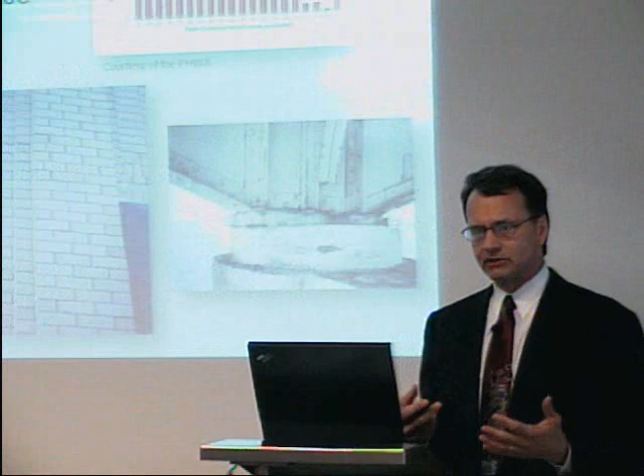By way of introduction, the aging infrastructure in developed countries requires cost-effective and timely inspection and maintenance. You've maybe seen this graph here on the right. In red is the total number of structures constructed as a function of year, these are bridge structures, and the black line is the percent that are structurally deficient. You can see that in the 40s, 50s, and 60s many new structures were constructed, but as time goes on these structures need to be repaired, so we have to be worried about this class of structures. The ability to detect damage at an early stage can reduce the cost and downtime associated with repair of critical damage.

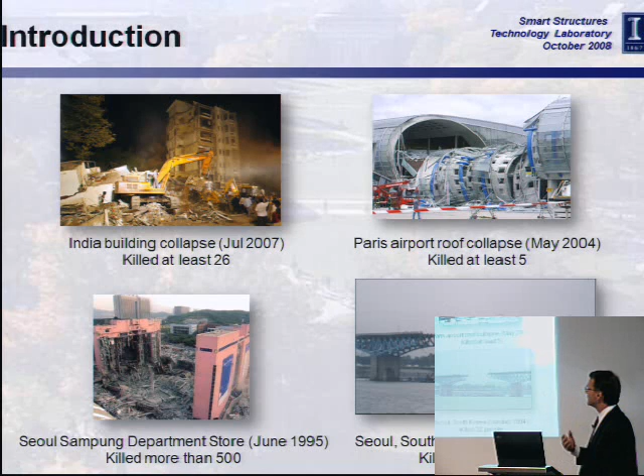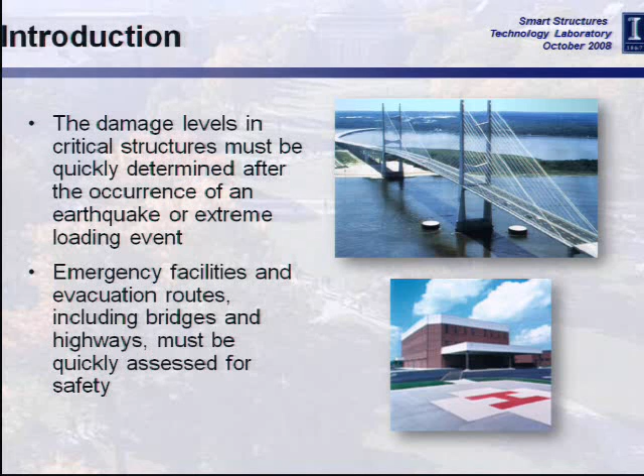Here are some examples: in India in 2007, in Paris in 2004, and a couple of examples in Seoul, where these structures were not known to be problematic, and all of a sudden there was a sudden collapse. In addition, we have to worry about natural disasters—earthquakes, winds, and other extreme loading events.

We have to monitor these structures to ensure that emergency facilities and evacuation routes, including bridges and highways, are quickly assessed for safety, and that appropriate steps are taken to move emergency vehicles along these routes. These are just some examples from Katrina and other recent earthquakes to remind us of the problems that can be caused by such extreme loading events.

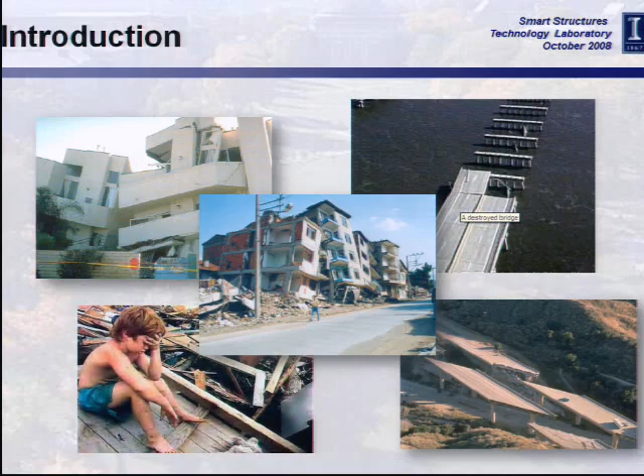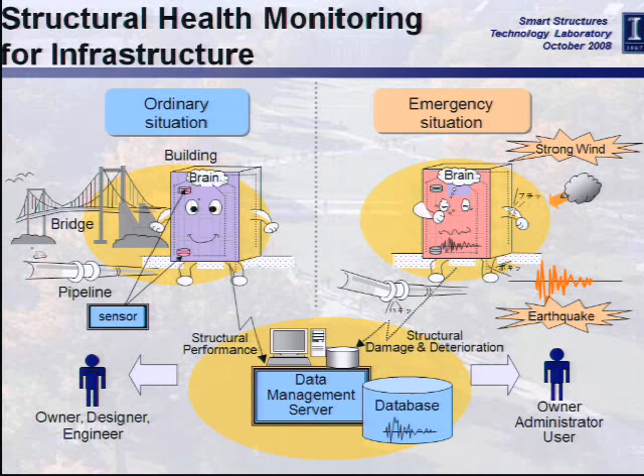I got this from a friend in Shimizu Corporation, and the Japanese are very good at making these cartoon drawings that illustrate the main problems. For a structural health monitoring system, we generally have two situations.

That is the ordinary situation, or maintenance and operation, and then the emergency situation. In the ordinary situation, sensors on the structure collect information about structural performance that can then go to a data management server, which can inform the owner, the designer, and the engineer.

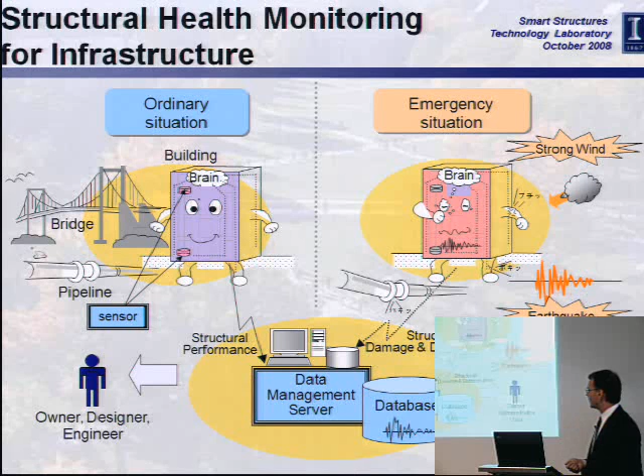In contrast, during the emergency situation, we have the critical need for more real-time information, so information about damage and deterioration during these extreme events can be fed into this data management system to inform the owner, administrators, or users, and to help in emergency reconnaissance.

As an outline of the talk I'm going to give today, I'd like to tell you about the current status of structural health monitoring technology for civil engineering applications, review a few of these, and then point to some of the most promising future technologies for structural health monitoring.

So why do we want to monitor infrastructure? I gave you some high-level views of this, but in particular...

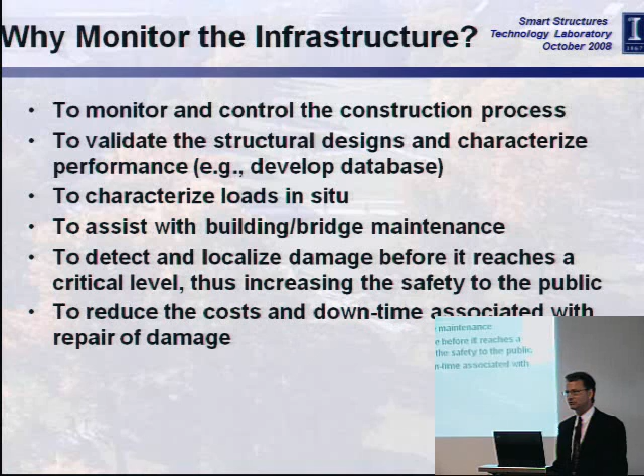People monitor structures to control the construction process as the structure is being built, to validate structural designs and characterize performance, develop databases, characterize in situ loads, and assist with building and bridge maintenance. Also to detect and localize damage before it reaches a critical level, increasing safety to the public, to reduce the cost and downtime associated with repair, and to assist with emergency response efforts, including building evacuation and traffic control.

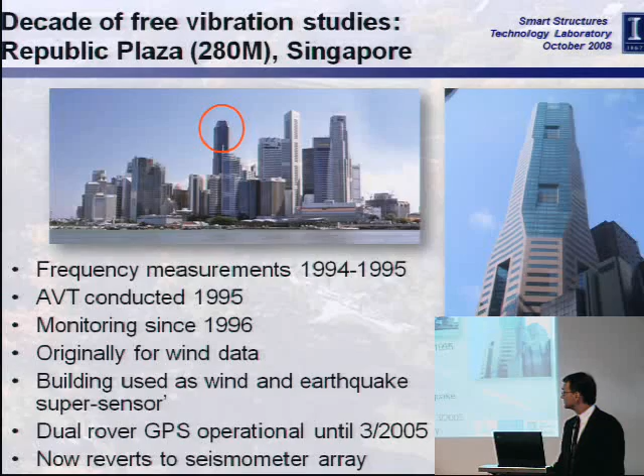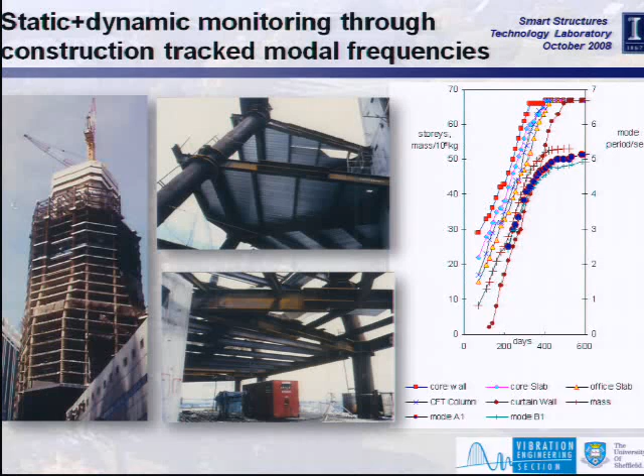You can see that whenever the construction was initiated, the period was quite short, very high frequency, and as the structure got taller and taller, the period got longer until it stabilized for the various components of the structure. This is what one would expect to see, and it can be compared to models of the structure to ensure the construction process is going as expected.

These are some of the sensors: force balance accelerometers in the roof and in the basement, anemometers, GPS antennas, and loggers. And here's what I meant about a super sensor.

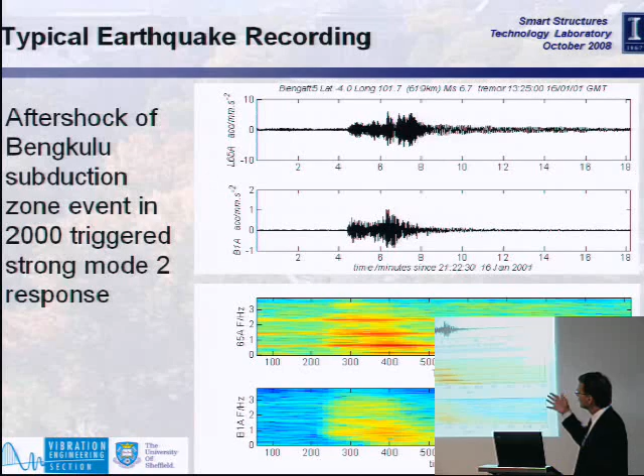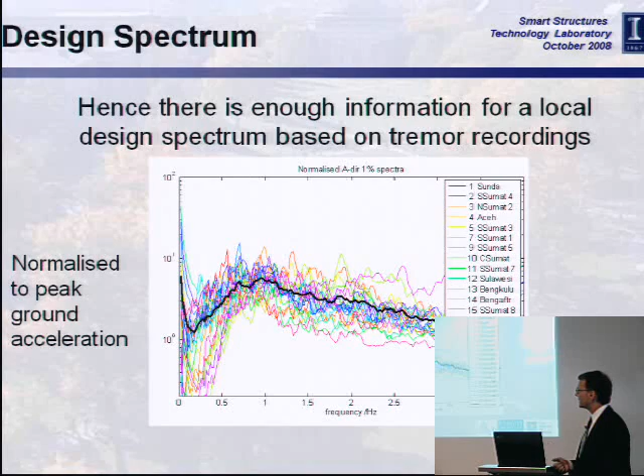These are some aftershocks from a year 2000 event. What we can do is, from these measured responses, develop enough information for a local design spectrum, so you can characterize the local loading situation much more effectively than with the typical approach.

Here's another example, from my colleague Ahsan Kareem at the University of Notre Dame, in partnership with Skidmore, Owings & Merrill in Chicago. One of the things they're concerned about is what type of damping real structures have.

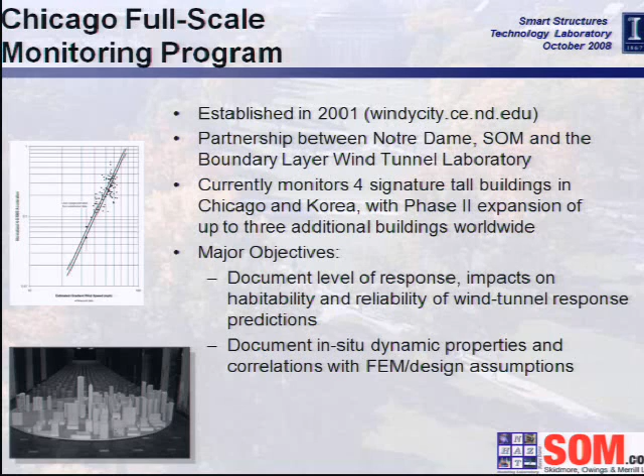If you're concerned about wind and you assume there's 5% damping in a real structure, you're in much better shape than if you assume there's only 1% damping. So if they can get a better handle on what the real damping is in the structure, then they can refine their designs.

This is Bill Iwan gave me this slide. This is a project to monitor the Millikan Library, and I thought this was relatively interesting. You've got a fairly short building, 10 stories. And what we have here is the data for the first mode.

If we just assumed that we had a shear building, which one might use for a 10-story building, that would be this blue line. And you can see it doesn't characterize the real measured dynamic behavior of the structure.

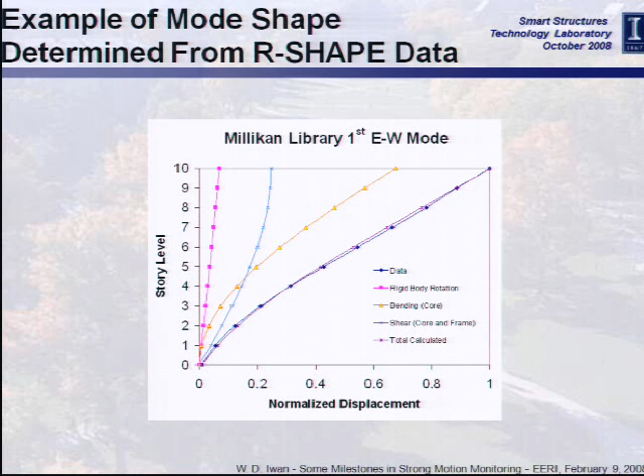If you assume that the structure was behaving primarily in bending, that would be this yellow triangled line, and you can see that doesn't capture the full behavior either. Then there's rigid body rotation, just rocking on the foundation of that structure. It's these combined motions that were actually present in the dynamic response of the Millikan Library.

So the assumptions that we would have in the design and construction of this building can be validated and better understood with this data that's measured here.

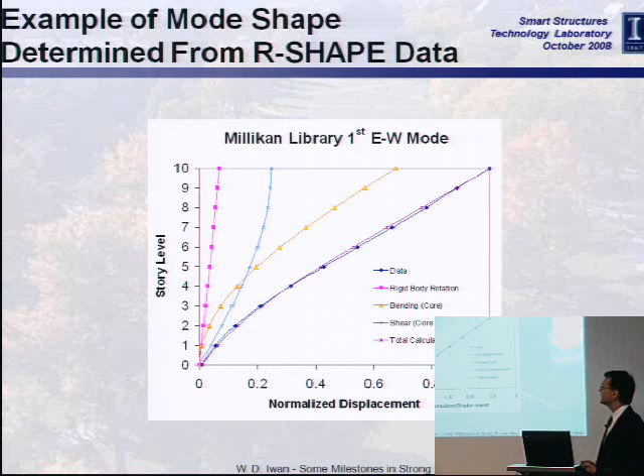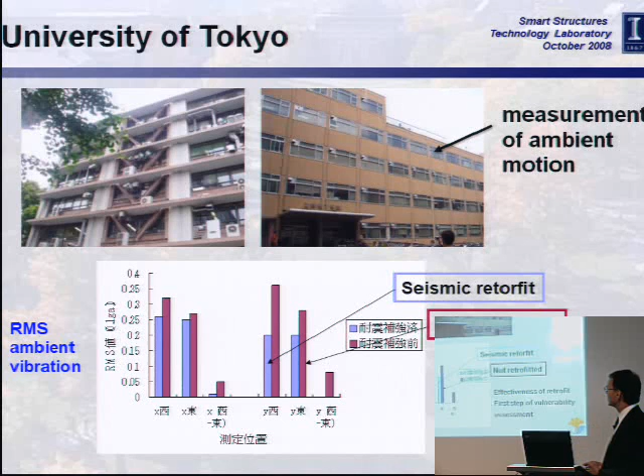This is an example from Professor Fujino at the University of Tokyo, where building number 11, I believe it was, was seismically retrofitted. They monitored the ambient vibration before and after the seismic retrofit, and were able to show a reduction in the RMS ambient vibration, which they concluded was an indication of the effectiveness of the seismic retrofit.

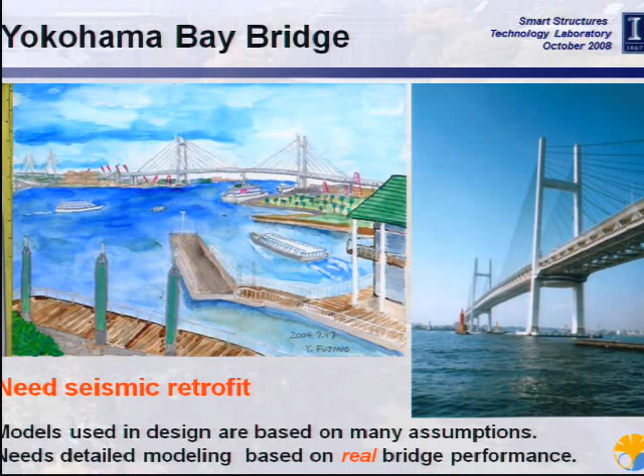Professor Fujino is also a painter in addition to being a bridge engineer, and the Yokohama Bay Bridge is shown here from his 2004 New Year's card. This structure had a number of models used in the design, based on many assumptions. But it needs to be seismically retrofitted now, and there's the question of how those initial models and designs compare to the as-built structure.

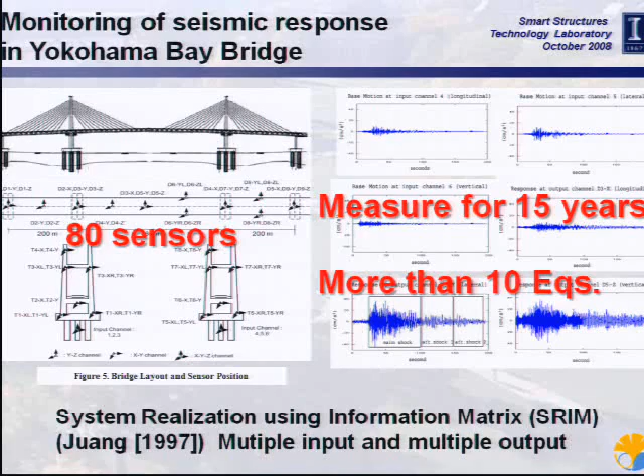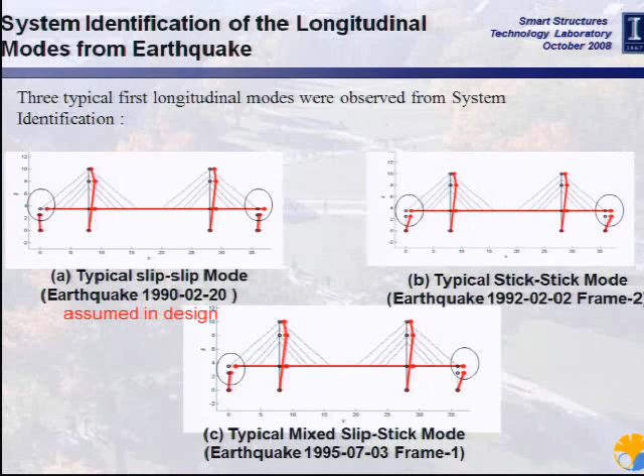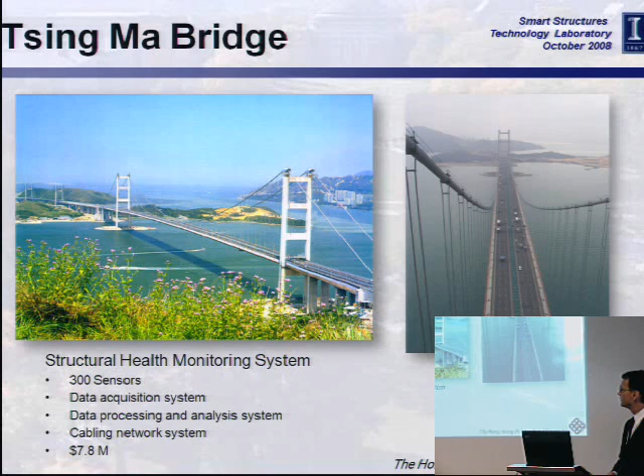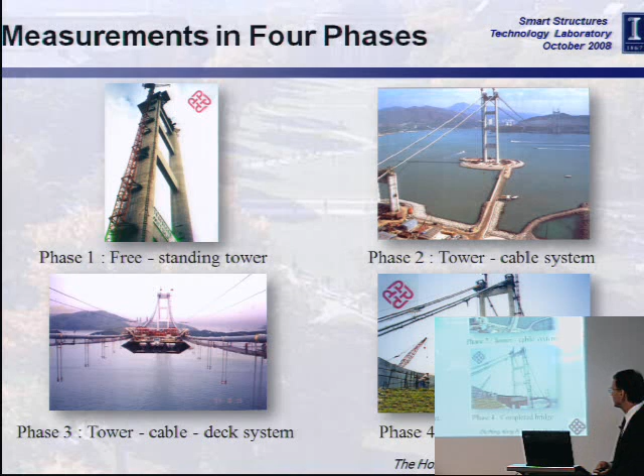So these were just some examples to illustrate where we are with structural health monitoring for civil infrastructure. Currently, we can do real-time data collection and presentation, data storage, data statistics and comparison with baselines, and then warnings of anomalies in the data. But that doesn't really fulfill the promise of structural health monitoring that we talked about previously.

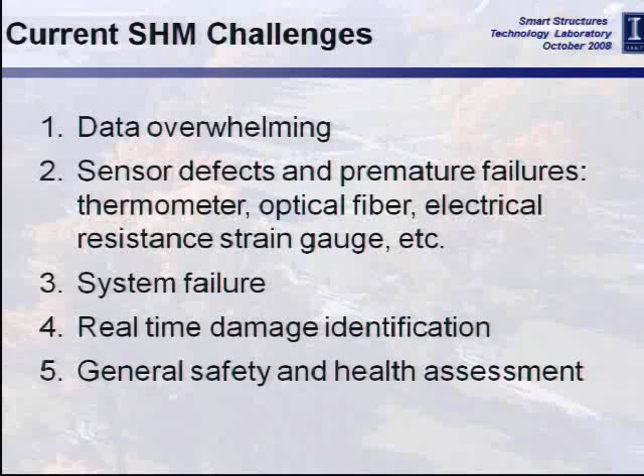Some of the current challenges are that the data is overwhelming—there's reams and reams of data collected for some of these bridges, and nobody ever sees it. Sensors have defects and premature failures: thermometers, optical fibers, electrical resistance strain gauges, etc. So reliability is an issue. Failure of the entire system, the data acquisition system, may go down. And then there's the idea of real-time damage identification and general safety and health assessment. So we're not there yet with regard to achieving this type of performance or information from structural health monitoring systems.

So what I would like to do now is tell you about some of the future directions that may address some of these challenges.

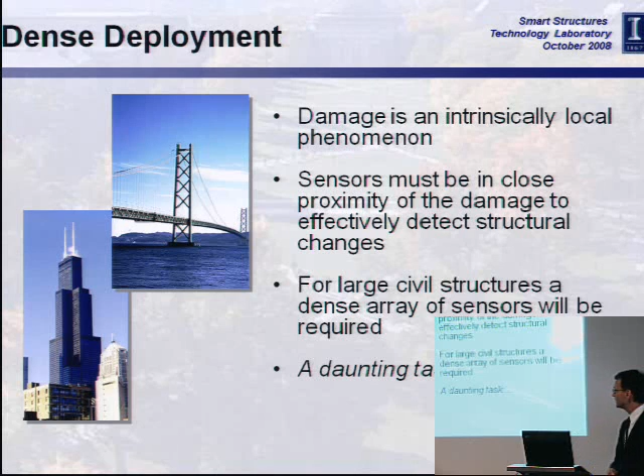One of the things that's been informing a lot of research these days is bioinspiration. As a matter of fact, there's a new program at the National Science Foundation that Dr. Shih-Chi Liu is leading on biosensing and bioactuation. It's in the Emerging Frontiers in Research and Innovation program this year.

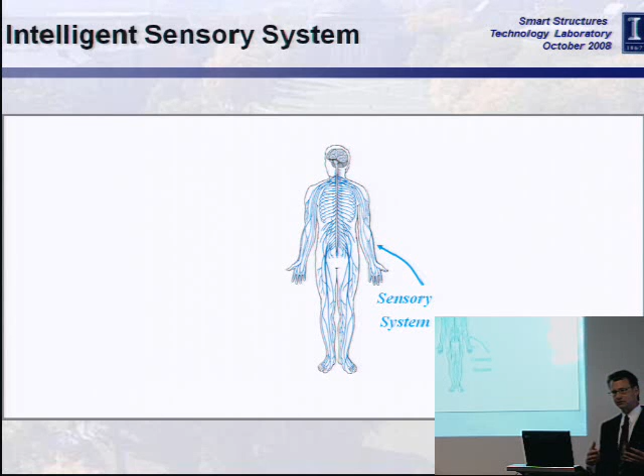If we look at the sensory system of the human body, you can see that there are sensors distributed throughout the body, and they're not uniformly distributed. In some locations you have more sensors where they're needed. So one might imagine that in a structure, to be able to detect damage and fully understand the state of the structure at arbitrary locations, one would need to have such a dense array of sensors.

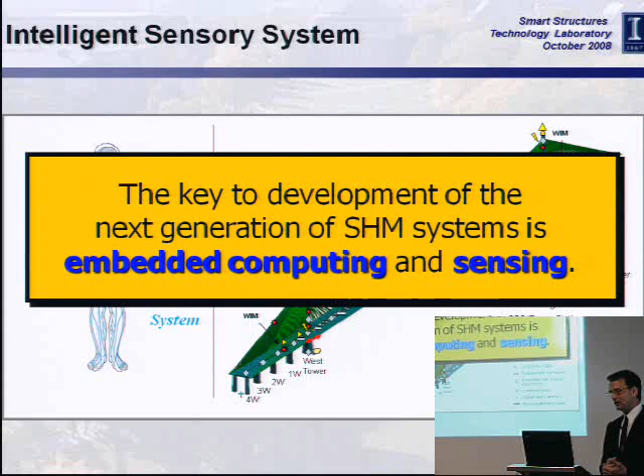So the key to the development of the next generation of structural health monitoring systems, to be able to have the scalability and the cost savings, is going to be embedded computing and sensing.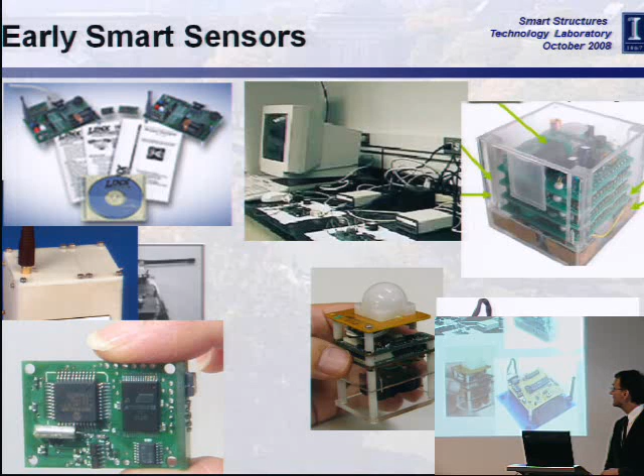So the embedded computing and sensing has often been termed smart sensors, and these are a few of the early smart sensors. One of the key features here is they all have onboard computational capabilities. They're wireless, battery-powered, they leverage technology, and are relatively low cost. But they were also all proprietary.

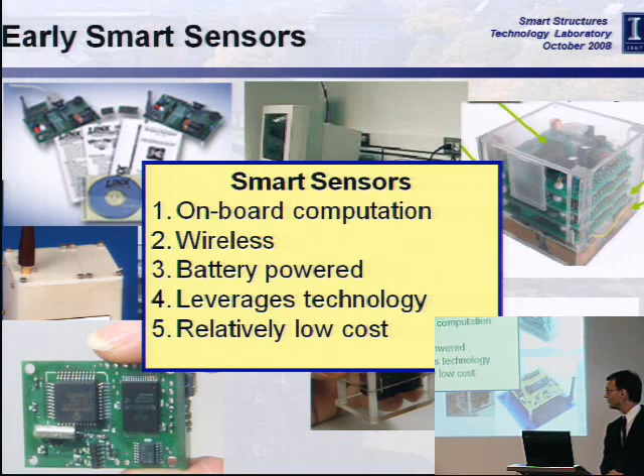And so if one wanted to try and do some work in the arena of smart sensors, you had to start from scratch developing your own sensor boards, your own radios, A to Ds, etc. You had to assemble your sensor from scratch.

And indeed, there's a wealth of companies out there today that produce these smart sensors, and it's estimated to be a $1 billion industry. So one might imagine that all you have to do is buy a bunch of these smart sensors and throw them on a structure, and then you're ready to go.

You've got your wireless system, you can communicate with it, you don't have to worry about the cabling. They're relatively low cost, a few hundred dollars each. You've got the processor, the storage, etc.

But it's not that simple. There doesn't exist a good framework and a sensing platform that can support the demanding high data throughput applications such as structural health monitoring.

Now, I do want to mention, though, this was a real milestone in bridge monitoring: the work of a student of Greg Fenves's, Shamim Pakzad, and then I think David Culler's student, Kim. They installed 60-some nodes on the Golden Gate Bridge to monitor it. This is the implementation, and the basic idea was that they wanted to emulate a wired sensing network. So you take your wireless sensors, and then you can harvest the data and do the processing via a centralized data acquisition paradigm.

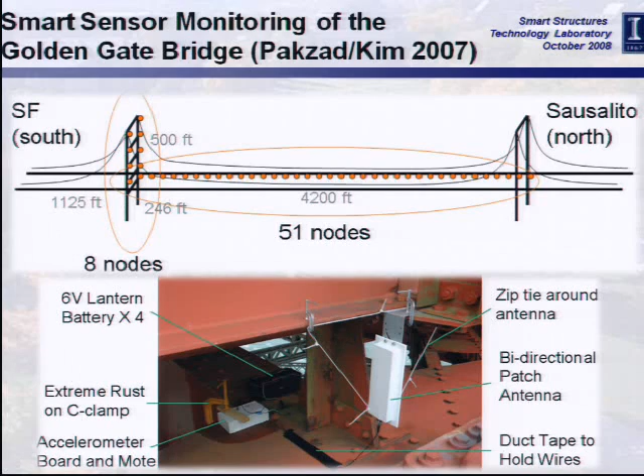So we've turned to a different platform than the Mica 2, which is what Pakzad and Kim used. One of the key features of the iMote 2, which is the platform we're using—it's an ARM processor, the XScale PXA271—is that it's got a user selectable clock speed from 13 to 416 megahertz. So it's got much faster processing capabilities than the Mica 2.

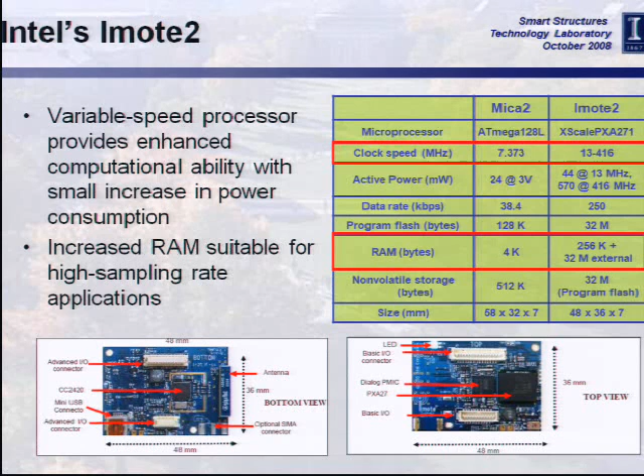So you can do onboard calculations. But maybe the most important thing is the available RAM. It's got 256K of available RAM on board and 32 meg external. So with this processor, you've got the speed and the storage to be able to do onboard processing of the vibration data.

Now, for us, one of the questions is how good is this sensor in terms of transmitting data? We've seen people report 30 feet transmission distances with the onboard radio of the Mica 2 as well as on the iMote 2. So before we adopted this platform, we wanted to do a thorough assessment of what type of performance we could expect.

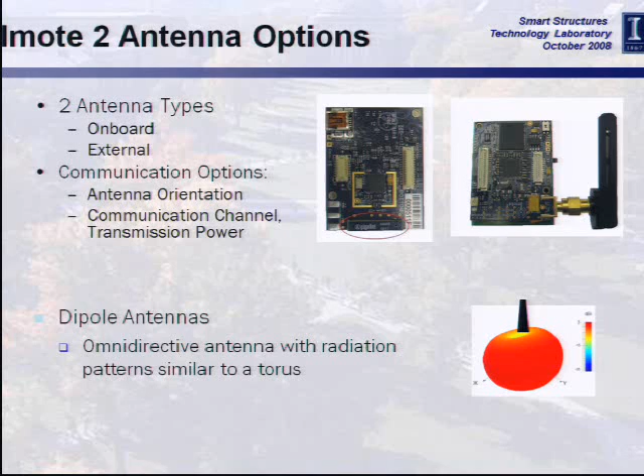The iMote 2 has a built-in antenna, circled on the left figure. We also considered an external antenna, shown on the right figure. We worked with Jennifer Bernhard in electrical engineering at Illinois—she has an anechoic chamber, so we could understand the characteristics of the antenna.

What you see here is the red pattern. This is the copolarization, assuming the receiving and transmitting antennas are parallel. The optimal situation is that the red interior here is the onboard antenna, and the blue line on the outside is the external antenna.

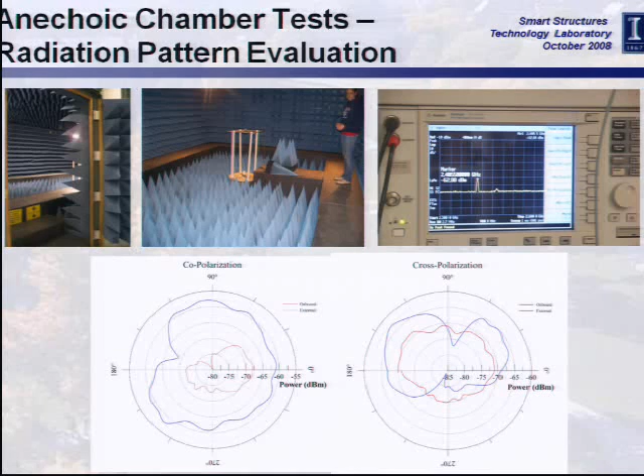On the right is the cross-polarization graph. What you see is that we get significantly better performance out of the external antenna. That's not so surprising, but also we don't have very much directionality here, so we didn't have to worry too much about how we placed the sensors as long as the antennas were parallel. But then we had the question of what does that translate into in the real world?

This is something that would be hard to find in the California area, but out in Illinois we've got big cornfields where there's no wires around, no Wi-Fi. So we went out to one of those cornfields and we were able to test the ideal performance of the radio.

We used a loop-back test where we used reliable communication to make sure that we got the commands to the remote location, and then we turned off reliable communication so we could understand the performance of the radio. What you see here is this was just for 2 sensors—we had a fairly small sample.

For the onboard antenna, which is at the top, you can see that at about 300 to 350 feet, we started to get a significant decline in performance. And beyond that, because it's digital transmission, it just completely died.

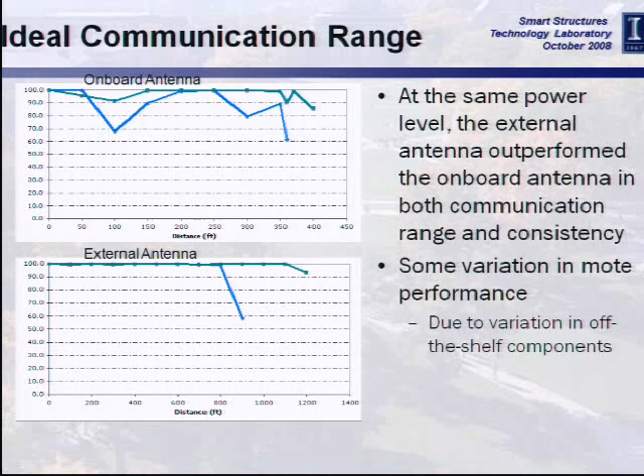With the external antenna, and these aren't on the same scale, what you see here is that we got about 900 to 1,200 feet transmission distance. So this told us that we probably wanted to use the external antenna for our applications, and it would indeed meet the needs of our structural health monitoring application.

So by understanding this, one can choose the channel for transmission for the iMote2 and get away from, or have less trouble with, the internet interference—but the microwave is still problematic.

We also wanted to see what's the effect of concrete walls and brick walls. We found that comparing when the iMote2s were in line with each other, as compared to if you put it behind a steel structure, reinforced concrete, or concrete masonry infills, we still got very good performance.

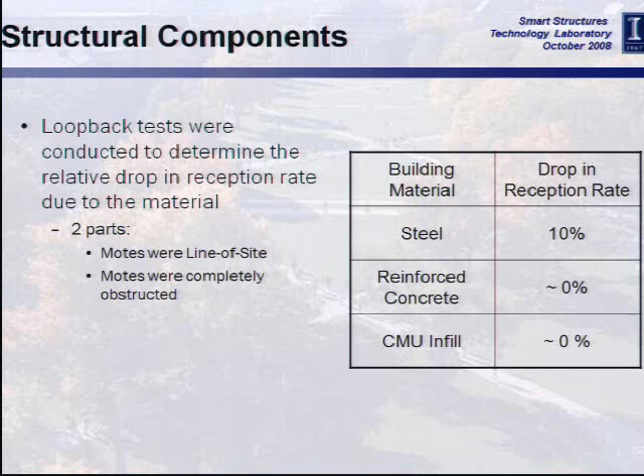So you may have other issues, but the performance of the antenna was quite good. So this gave us confidence to use the iMote2.

Then we went on to the next question of figuring out what sensors we can use. As with many of the smart sensors, the sensor board is stackable, so you have 2 options for using sensors on this one. The interface allows digital I/O only, and there's no onboard A to D. So you either use the basic sensor board, which was created by Intel, or you develop your own.

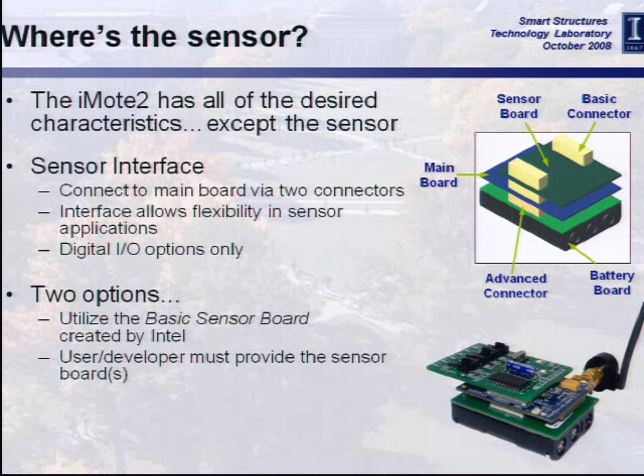We started out using the basic sensor board because you say, well, if there's something already developed, why not use it? And we were shocked. This is the basic sensor board, top and bottom, and the features are a light sensor, temperature and relative humidity sensor, and a triaxial accelerometer with an onboard A to D converter. So you get a digital signal out that can be sent directly to the iMote2.

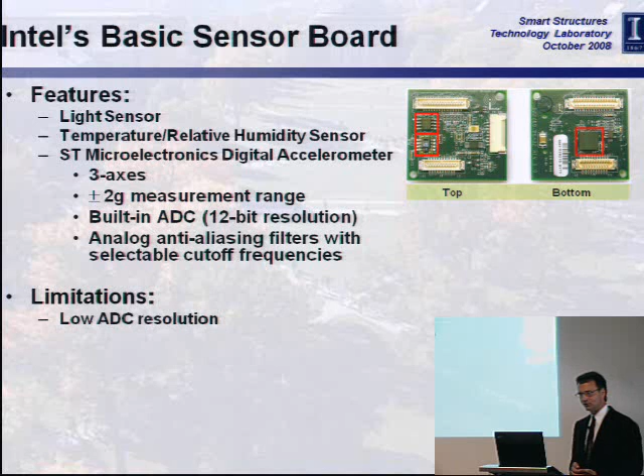The limitations, though: it has low ADC resolution, so you only have 12 bits. And this was one that just shocked us. They said the nominal sample rate was user selectable, plus or minus 10%. We thought this was maybe a 6 sigma bound. How is it possible you could have a plus or minus 10% sampling rate on a sensor? But indeed, with this handful of sensors that we had, we saw a plus or minus 10% sampling rate.

So how can you use a sensor? You set it at 560 hertz or 280 hertz, and it's really sampling at 245 hertz. This was surprising to us. Another thing is that even within that, the clock jitter, we had variation in the sampling rate as a function of time. So this basic sensor board, as it came, you could pick it up, shake it, and everybody'd say, oh yeah, there's a signal on your screen. But it was useless for the purposes of structural health monitoring.

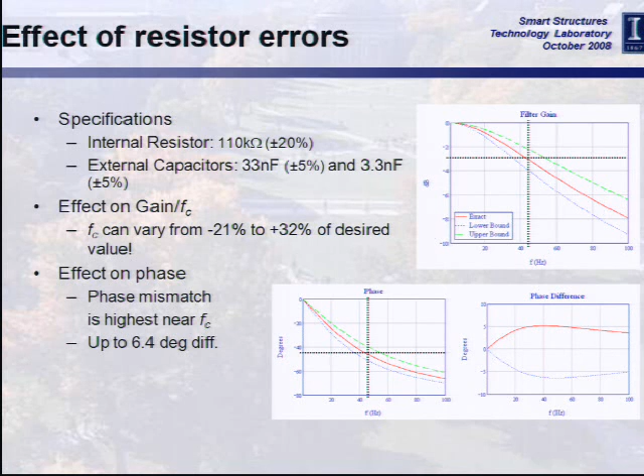In addition, for those of you that have taken data, aliasing is a problem we all deal with. This system had a single pole anti-aliasing filter on it, set to be user selectable depending upon what capacitor you put on there. But they said the resistor was specified as plus or minus 20%. You say, well, gee, that's a big range. And indeed, it was. There wasn't any way to measure it directly, but based on our experiments, we found out that they weren't joking. It was roughly plus or minus 20%.

So what happens is you've got this filter. In this particular case, the cutoff is a little over 40 hertz for the nominal parameters chosen. Because you have this variation in the value of the resistor, your anti-aliasing filter can have a significant variation in the gain, and the phase mismatch can be even larger. So you can have a plus or minus 5-degree phase mismatch at 40 hertz. Again, the quality of your data is going to be useless. You can make some nice pictures, but it's not appropriate for engineering use.

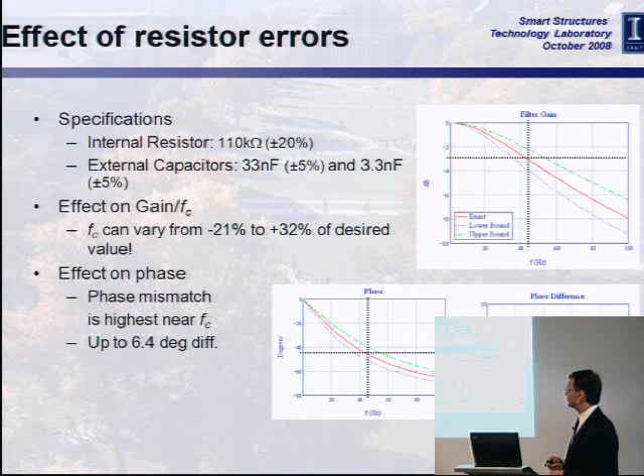So now what I'd like to tell you about in the time remaining is the framework we developed at Illinois. These are the various components of any sensor network: the sensor nodes, the network, and the algorithm. We've made some contributions in all of those areas, and then there's the system integration.

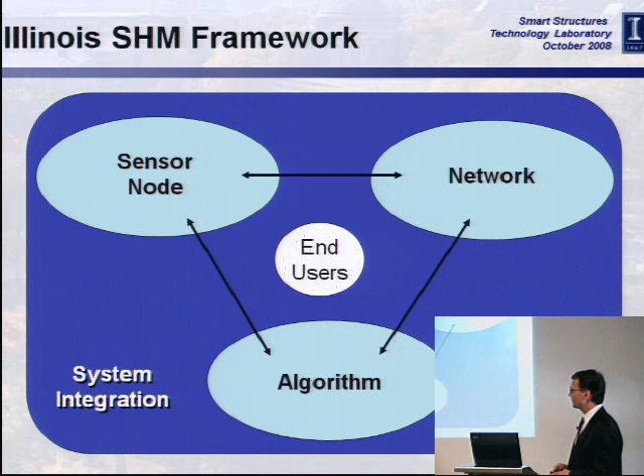Our efforts have been focused on using the iMote2, and we developed a new accelerometer board that I'd like to tell you about. We've developed some open source middleware services that we hope lower the bar on using this platform. And then we've developed some new strategies for detecting damage that can be implemented in the distributed computing environment intrinsic to smart sensors.

Let me first turn to the accelerometer. This is what I showed you before. We designed a board—Jennifer Rice, one of my students, designed a sensor board. It has 3 axes of acceleration, user-selectable anti-aliasing filters, so we can go from 10 hertz sampling up to 115 kilohertz sampling.

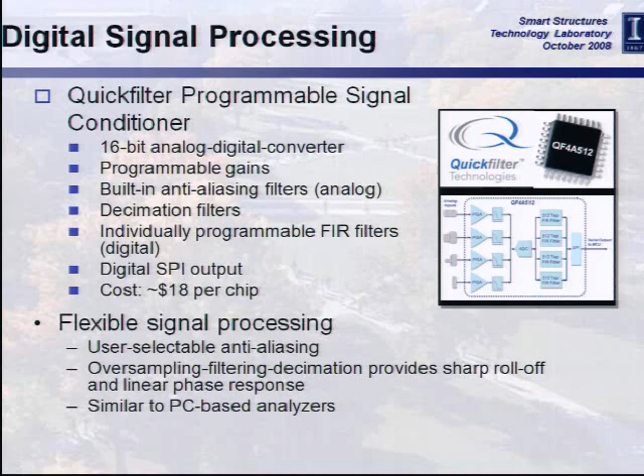The key is this 16-bit A to D converter, which is a Quickfilter chip. It samples at 12.5 megahertz, has a 500 kilohertz anti-aliasing filter, and then does digital filtering and decimation after that. It's relatively inexpensive, and directly dumps the output out for the iMote2. It's a 4-channel A to D converter, so we can get high-quality measurements using this Quickfilter DSP chip and have the anti-aliasing filters built in.

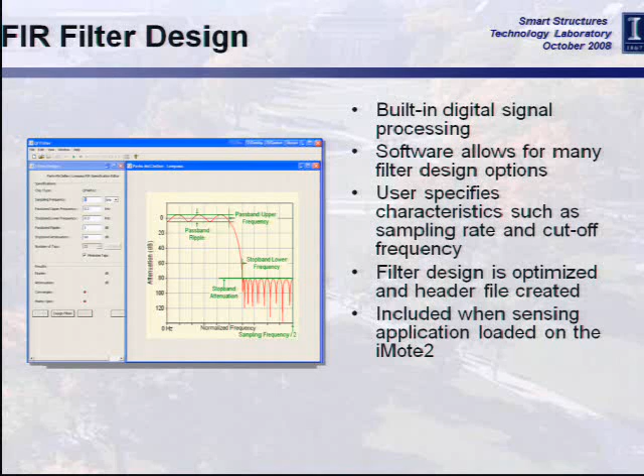As a matter of fact, they give an FIR Filter Design tool, and this is the type of thing we might use to design the anti-aliasing filter, an elliptic anti-aliasing filter. Here you can see you can determine what the roll-off is and what the ripple is in the filter, and then you download that directly to the chip, and then it's ready to run.

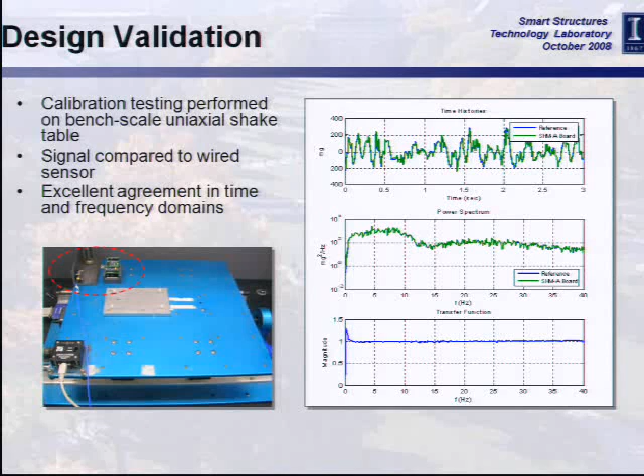This is just some testing of that accelerometer compared to a wired reference accelerometer on this small shaking table. What you see is the time domain, the frequency domain, the power spectrum, and then this is a transfer function between the two sensors. It's very flat except below 1 hertz, and that's more a limitation of the shaking table than a limitation of the sensor.

So this iMote2 combined with the SHM-A sensor board forms a good platform for us to do our work.

The next thing I'd like to tell you about is the middleware services we developed, in partnership with the Open Systems Laboratory, Professor Gul Agha's group at Illinois. Middleware services are the glue that bridges the gap between the SHM application and the operating system. We're using TinyOS in this application.

So we've developed three classes of middleware services. The first is efficient data and power management, so we developed some model-based data aggregation approaches. One has to worry about data loss, so we developed reliable communication protocols. And then also high-quality synchronized data, so we developed synchronized sensing protocols.

Because of time, I'm only going to tell you about the last one, because it was also one of the most mysterious for us. There are many synchronization protocols out there. In this particular case, we used a beacon approach where we could get synchronization to approximately 20 microseconds, very high synchronization. But what we found is that the clocks on those chips drifted on the accelerometer chips.

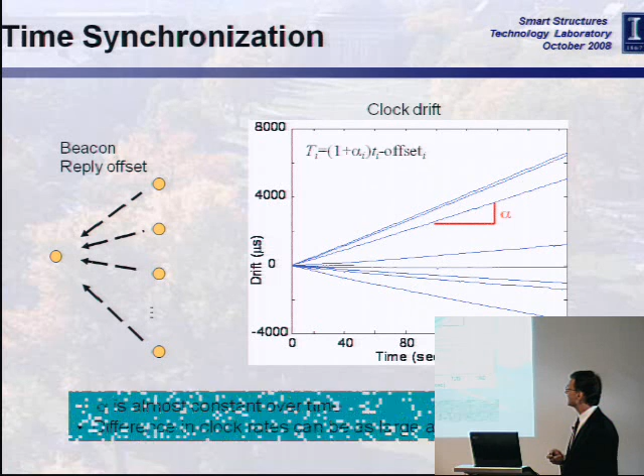So we had to not only synchronize, but then get the offset and create a linear reference, a linear mapping for the various clocks so that we could keep synchronization over a long enough period. This is only 160 seconds, so it's not like it's over two days. And so this is an important issue.

But after you do the synchronization, that doesn't get you synchronized sensing. That may be somewhat of a surprise, but what we found is that when you have, sometimes I do this, I say, okay everybody, when I say go, raise your hand, and there's a distribution of when people raise their hands. It's similar with the sensors. When you say start sensing, there's a microprocessor in there. It may be busy. If you open up Microsoft Word, sometimes it opens quickly, sometimes it doesn't. It depends on what the processor is doing.

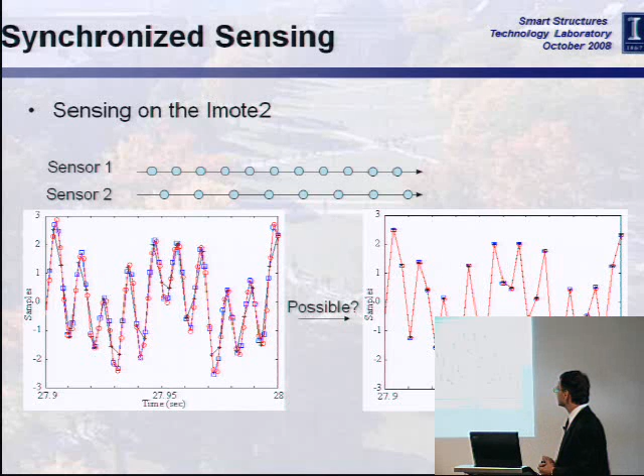So unless you shut down all the processes on the smart sensor except for sensing, you're going to have this variation. And you've got differences in sampling time also. So if you took a bunch of sensors that should be generating the same signal, this is what you might get, a hodgepodge of responses. Is it possible to get those sensors to give the same response? If you're measuring the same response, can you get it to give the same measured response? Or can we take those sensors and get them on a common time basis?

So Tomo Nagayama worked on this problem, and he developed a resampling strategy where you take and upsample the signal by putting zeros on the axis. You then filter, and then downsample. The problem is that if you have two signals that are very close to each other in sampling frequency or in their starting time, you have to do a huge upsampling to the megahertz range.

This is not possible to directly implement. Instead, we use this polyphase implementation in which we did linear interpolation between the nodes so that we could get finer resolution, and this provided the performance that we needed.

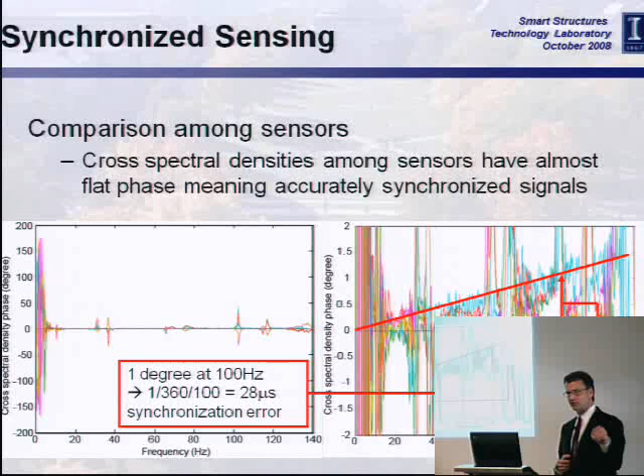On the left here, these are some sensors that should have the same phase since they were on the same structure receiving the same excitation. Looking at the cross spectral density, there's roughly 1 degree at 100 hertz, or about 28 microseconds phase difference. By using this resampling approach, we're able to get not only synchronized nodes, but synchronized sensing, which is critical for the application.

Let me tell you about this distributed computing strategy. Typical approaches for structural health monitoring use centralized data acquisition, where all the information is brought into a central computer. This is not scalable to the large number of sensors that we expect.

The analogy that's good here would be like everybody in the United States trying to talk to the president at the same time. Maybe you don't want to talk to the president, but it's still a good analogy.

In contrast, there are people that have proposed an independent processing approach where each of the nodes don't talk to each other, like in a society where everybody is their own doctor, their own lawyer, etc. This approach in particular, you lose spatial information about your structural system, so there's no information about mode shapes, although it is scalable.

So the approach that we've advocated is a hierarchical approach in which there's collaboration among the various nodes in the structural system. This also has the analogy to our representative governing system.

Now, we used what's called a damage locating vector approach to implement the damage detection strategy in a distributed manner. I'm not going to go into great detail here, other than just to give the basic idea.

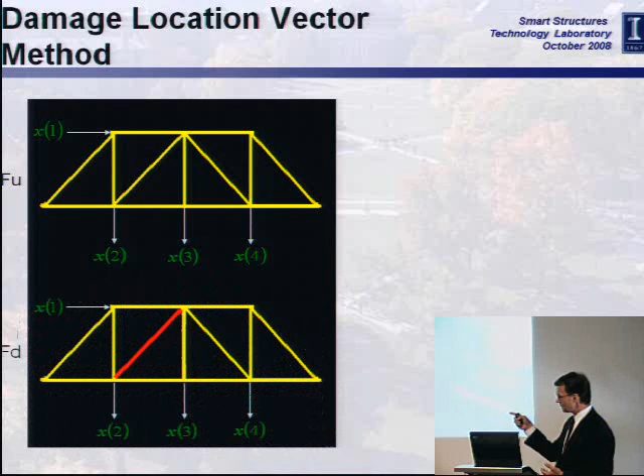This F sub U on the left is the undamaged flexibility matrix that's been experimentally identified. Through continuous monitoring, we can get an experimentally determined flexibility matrix of the damaged structure.

We then form and determine a set of vectors L such that the displacement in the undamaged and the damaged structure is the same. This gives us a problem where we can find L in the null space of that difference matrix.

Physically, what this says is that I'm looking for the load vectors that don't induce load in this damaged element - if there's no load in the damaged element, the displacements before and after damage are going to be the same. So I'm looking for the set of load vectors which will induce no load in the damaged element.

I then apply that to an analytical model of the structure, and I look for those elements which have low stress, and that gives me the candidate damage location.

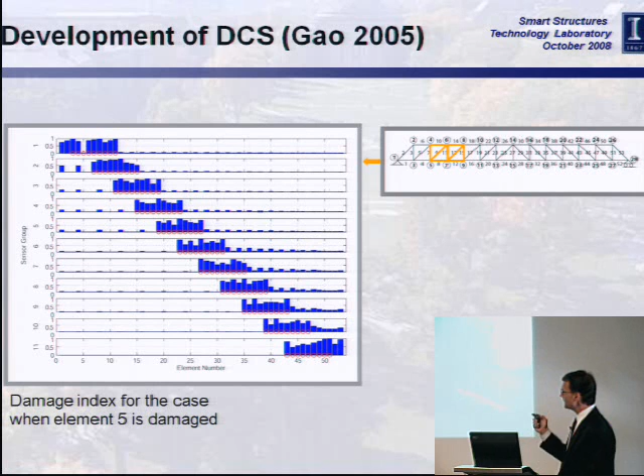We then go on to the next group of sensors, and we find that the damage indices don't indicate a damaged element, and indeed that's the case in the remainder of the structure - there is no damage in those others. This gave us the hope of being able to use this localized damage detection.

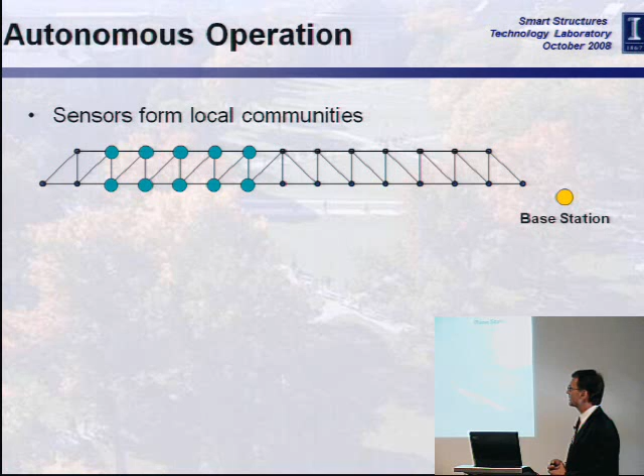Within the communities, model-based data aggregation takes place. Damage detection is implemented using the stochastic damage locating vector method. Then the cluster heads communicate with each other to compare: I found an element in my group that was damaged - did you find that element was damaged?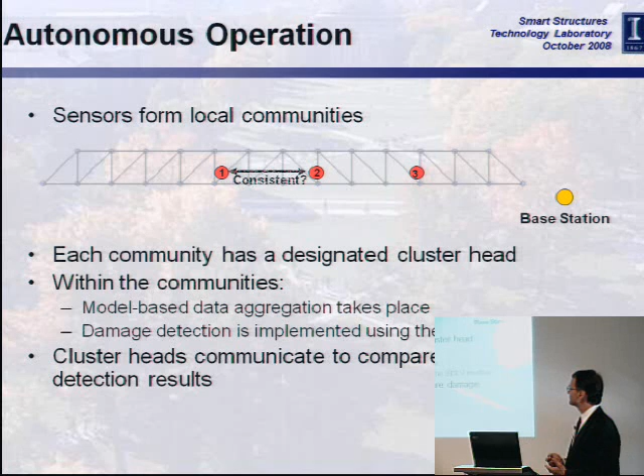And if it's consistent, then the information is reported back to the base station. If it's not consistent, then damage, or the data is retaken.

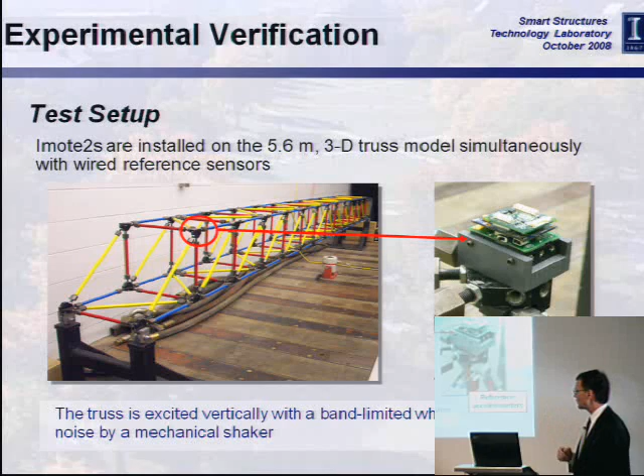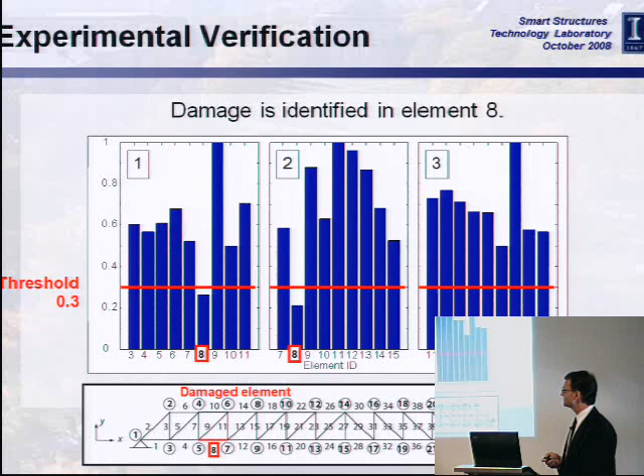This is a test structure in our laboratory, and you can see the iMote2 mounted there. We also mounted some reference sensors to keep us honest, so we could see if the data we were collecting with the wireless sensors was of adequate quality. What we found is that, in this particular case, element number 8 was damaged, as shown here. Element number 8 was in 2 of the groups, groups 1 and 2, and it was identified as being damaged in both cases. So the efficacy of this approach has been experimentally verified.

Tomo Nagayama worked on this for a couple of years, and when he left last year, we had to retool. The code he wrote was about 1.8 megabytes, 207 files, 50-some thousand lines of code. For another student to dig in and use any of that is a virtually impossible task. So it works, but it was of almost little use.

So what we did was work with our computer science department, Gul Agha, to develop a service-based architecture and what we call a structural health monitoring services toolkit. It's written that way, this is interesting.

This just shows where we came from and where we are. First is where we were: the time frame for writing a program on the iMote2 was years, basically a PhD dissertation. With the toolkit we've developed, it's now a class project, 1 to 2 months, and we're moving toward a macro programming environment where you can program the network in a matter of minutes.

Now we're at this level, and that services toolkit's contents include foundation services such as universal sensing, time synchronization, reliable communications, and a numerical library. There are application services, including correlation function estimation, eigensystem realization, etc. And then there are test applications and tools and utilities that are available.

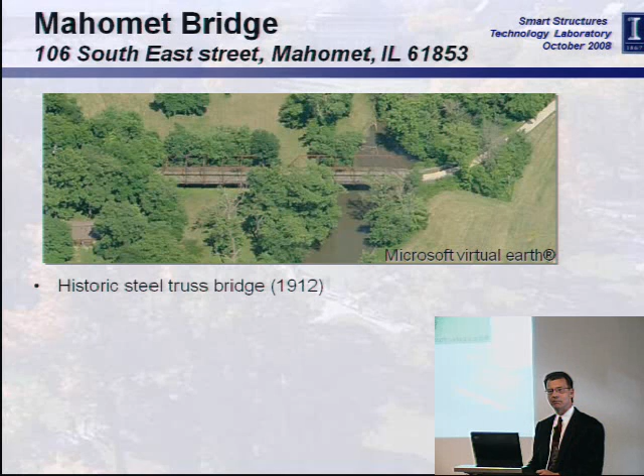This is a historical bridge built in 1912, about 8 miles from Champaign. You can see it has 2 spans. It's over the Sangamon River in Mahomet. It used to be a traffic bridge, but now it's a pedestrian bridge, so it's very good as a test bed, serving as a full-scale bridge prototype for other applications.

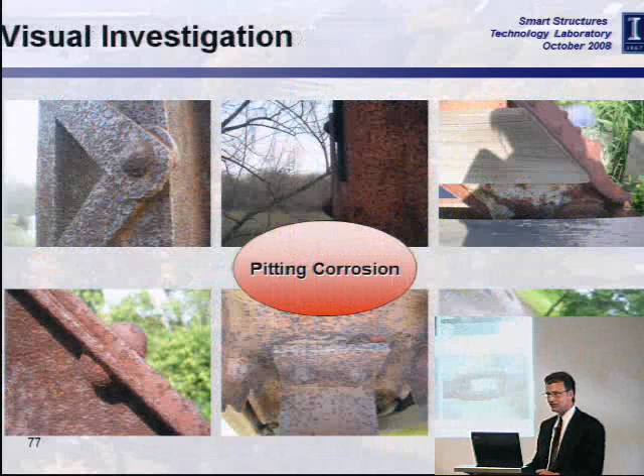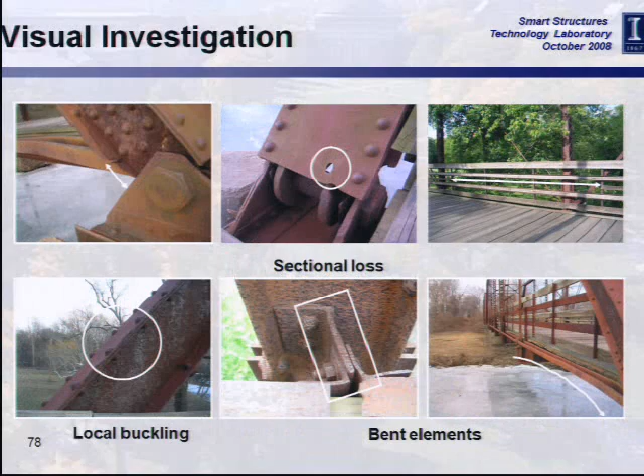Here's a picture of the bridge in various seasons, and you can see it's been quite worn over the years. This is some of the pitting corrosion that is seen. There's also section loss, local buckling, and bent elements. And you can see where it's been damaged, completely corroded away, and they've welded in some supports.

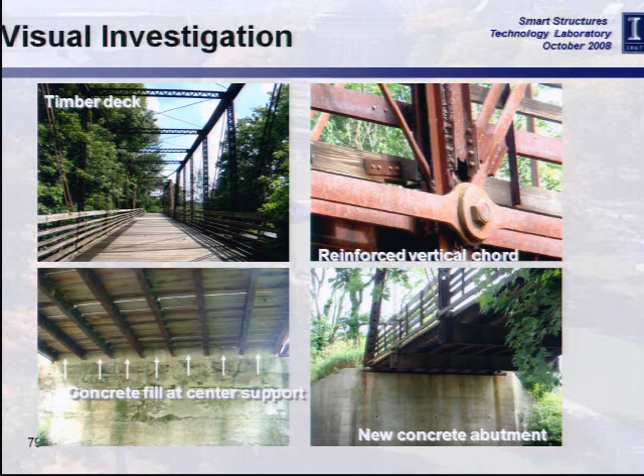The thing we can do with this bridge is we've got 2 identical spans. We can't damage it further, couldn't get damaged much more anyway, but we can compare the 2 spans, one damaged, one undamaged, and look for anomalies between the two.

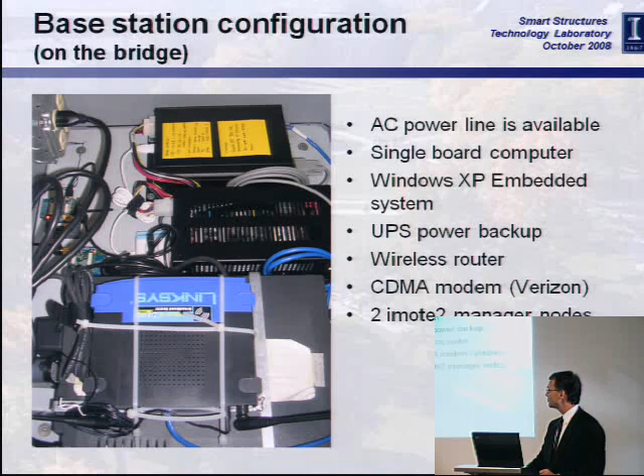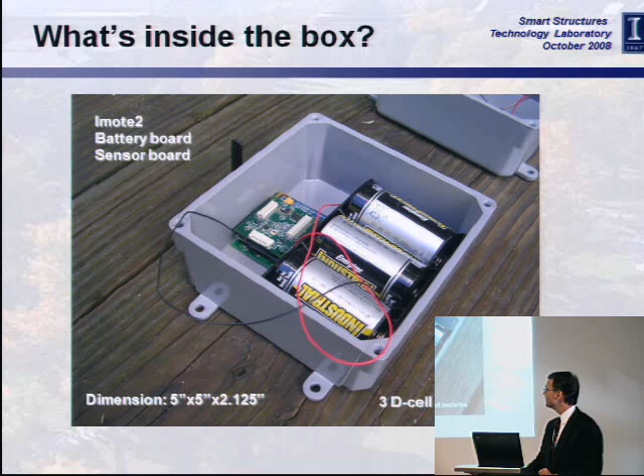This is where we installed the base station, underneath the center pier. That base station has the ability to communicate with the wireless sensors, and it also has a CDMA cellular connection and a Wi-Fi connection. Here are some of the sensors being mounted on the bridge, in those small boxes. Here you can see what's inside: basically D-cell batteries, the iMote2, the battery board, and the sensor board. And there they are, mounted on the structure.

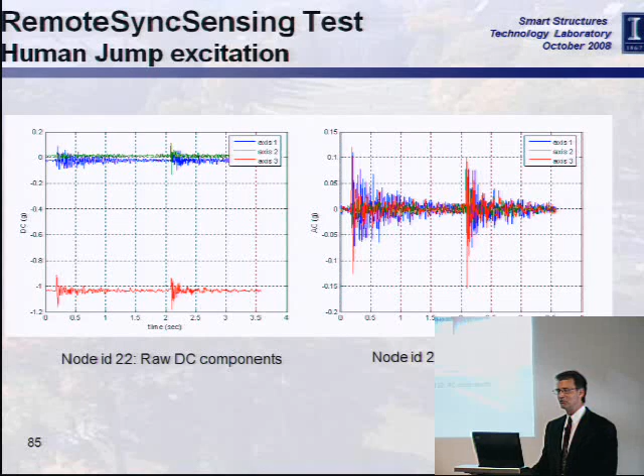And here is some data that we collected from the sensors, from the triaxial accelerometer, due to the typical jump test that one uses in these types of structures.

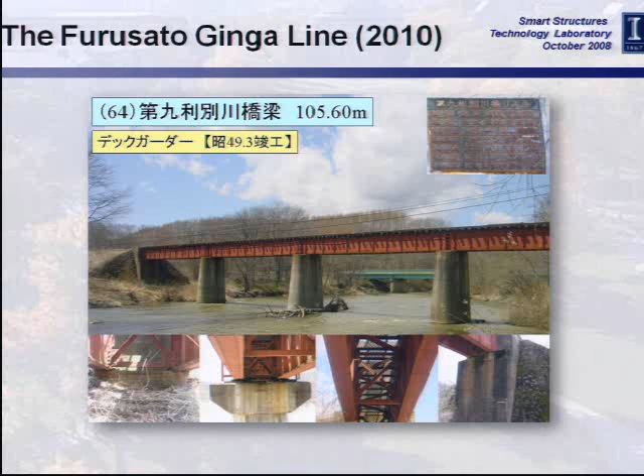So in conclusion, the need for structural health monitoring systems for civil infrastructure increases very rapidly in industrialized nations. And it's very exciting because it allows us to better understand our physical world.

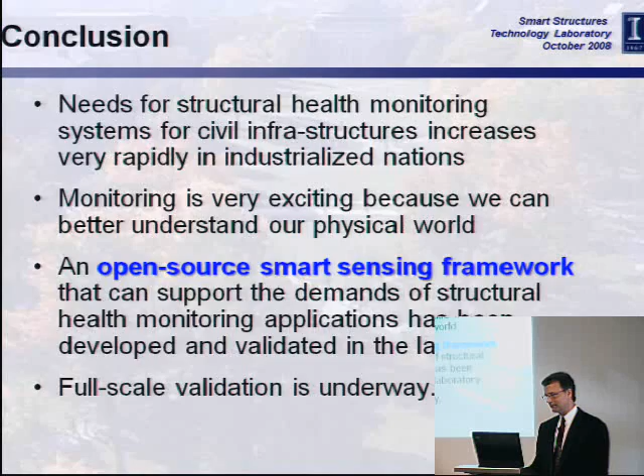What I hope to have shown you is that there's an open source smart sensing framework that one can pick up and run with in various applications, and that full-scale validation is underway. This is the website where the various reports from this work, as well as the software, is available. So if you have interest, I hope you visit there and also contribute to the software base.

Thank you very much.